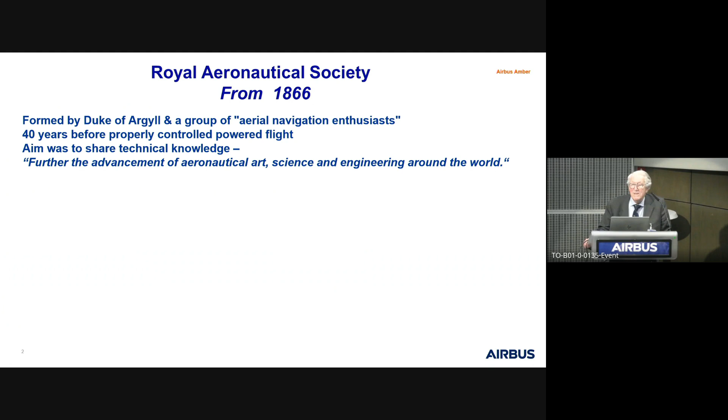A little bit about the background to the Royal Aeronautical Society. A lot of you have seen this too many times before, but some of you haven't. It started a few years ago, and the aim was to share knowledge, and further the advancement of aeronautical art, science, and engineering around the world, which we endeavour to do. That's one of the reasons we're here.

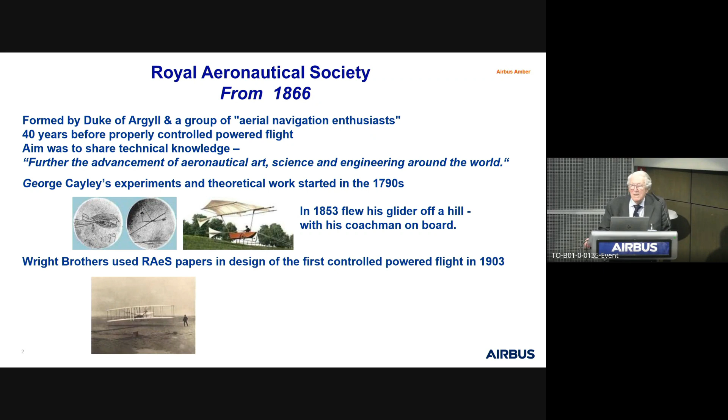People say, well, what were the Brits doing before that time? Well, George Cayley started his work in the 1790s, and worked out from his large mansion the forces, mainly lift and weight and thrust and drag. Going on from that, he actually launched a glider off a hill with his coachman on board. That's a replica with the intrepid Richard Branson on board a few years later. The fact is also the Wright brothers said they used part of his papers in the design of their airplane, which of course made the first controlled powered flight in 1903.

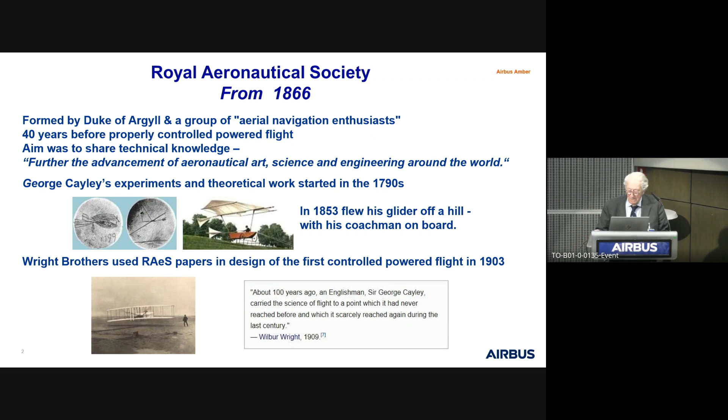The Royal Aeronautical Society has 67 branches in 20 countries. We now have 6 in Europe or the European continent, as the UK is still part of Europe, and the latest one was in Berlin. We encourage people to join either the local branch here or the branch in London, and applications are online.

Now, we are celebrating, of course, the Gordon Corps Lecture, and we have Nick, Gordon's son, with us. Going back to when the branch was formed by Gordon, because he was instrumental in starting it, and that was a group that joined, we still have 2 people from that time.

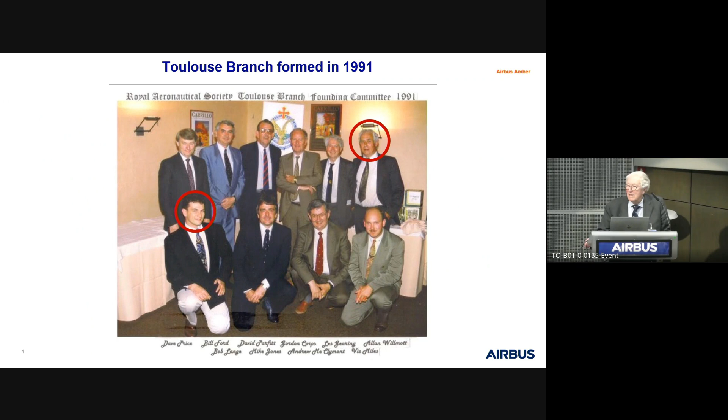Bob is still with us, and we have to thank Allan Willmott, who is actually registered online. He hasn't come today, but he kept the whole thing going in the late 90s, I think.

So this is Gordon's history. He was in the RAF, flew lots of airplanes. He became chief test pilot in the UK, mainly involved in the certification of the Concorde and the VC-10. Then he joined Airbus and was instrumental in the fly-by-wire system, initially on the A300. Very sadly, he died while investigating an A300 accident in Nepal, and as a result, he was honoured by this lecture.

The lecture theme is aviation safety or flight testing—Yannick Melange would have done flight safety this time, but we're doing flight testing. The lecture shield was started, which is outside, and his children, Nick, Debbie and Bryony, have been central to supporting their father. Nick is here tonight.

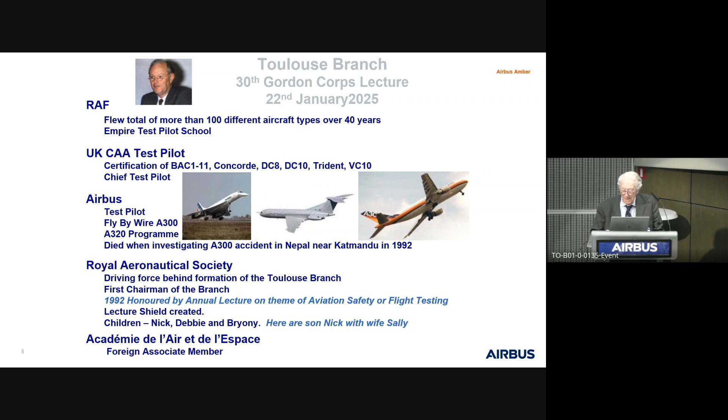He was also a member of the Académie de l'Air et de l'Espace. And there is the shield, which we have outside, with pictures of Gordon and his wife. Now, we have tonight our president of the Royal Aeronautical Society in London, David Chin, who would like to say a few words.

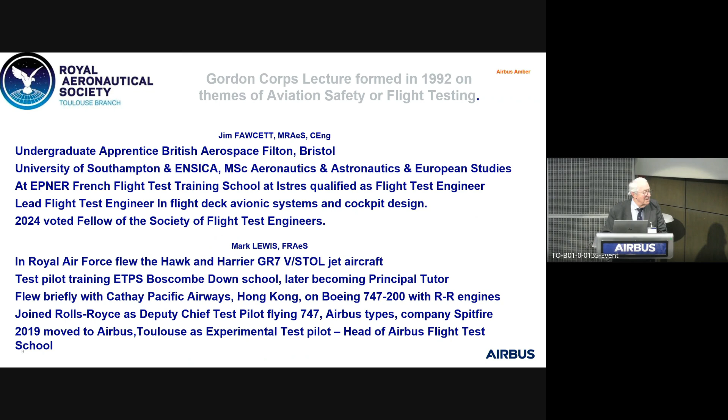As Hugh mentioned, this wasn't entirely expected for myself and Mark. We weren't expecting to be here this evening, even though it's a great pleasure. We had a phone call a couple of weeks ago asking if we could help out, and I found myself scrambling for knowledge about your father, because even though I've been working for Airbus for 30 years, I never had the privilege to meet him.

By an unbelievable coincidence, I opened a book which I received as a Christmas present this year, written by a previous flight test engineer from the UK, John Smith, full of interesting anecdotes about his time working in the UK, including at the CAA and with your father. I hope you won't mind if I share one of the little anecdotes from this book. Many of them seem to involve going to the pub, so it won't be one of those.

This one is about an incident Gordon had flying in the States as a CAA pilot. He'd been involved in an evaluation on the Gulfstream II, and Gordon was flying from the left-hand seat as usual. During a normal takeoff, they encountered a flock of large birds, some of which entered both engines just as the aeroplane was about to get airborne. Sounds familiar, doesn't it?

At that stage in the takeoff, they were above V1 and strictly should have continued. Gordon made an instant decision, as he had no idea whether either or both engines were still capable of producing significant thrust. He closed both throttles, put the aeroplane firmly back on the runway, and stood on the brakes. Even at that speed, there was just sufficient runway left to complete the stop. I heard later that the Gulfstream test pilot and others on the flight deck burst into an impromptu round of applause, and apart from two damaged engines and some very hot, worn-out brakes, they had Gordon to thank for still having themselves and their precious aeroplane intact.

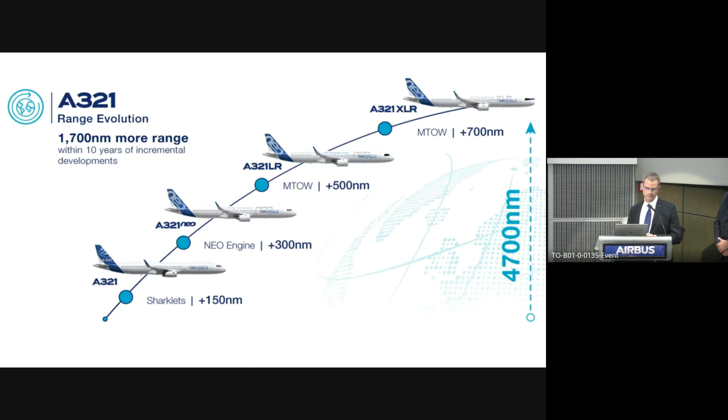But the customers wanted more. The trade studies suggested that more was possible. And so the progression was made to the extra long range with additional fuel tanks, a significantly heavier max takeoff weight, and therefore a lot of modifications to cope with a greater range of weights, centers of gravity, and greater range. So 700 miles extra, and depending on how we calculate the final figure, it's in the order of 4,700 nautical miles, which is a long way on a single aisle airplane.

So some really quite long stage lengths, as we would call them, or city pair connections, with anywhere between 180 passengers up to 244, depending on the level of comfort and the type of commercial operation that you choose.

Many of the new customers for this airplane, and I think we have over 550 orders, are putting really quite heavyweight seating in the front of the airplane. The lie flat business class seats, the newer ones some of you may have sampled, weigh a lot. So it has a big implication for the operating empty weight of the airplane and the CG before we start adding fuel. It's a very, very efficient airplane.

It's been engineered and reconfigured, including changes to the flap settings for takeoff, to really optimize and find the optimum performance for the city pair choices of the airlines.

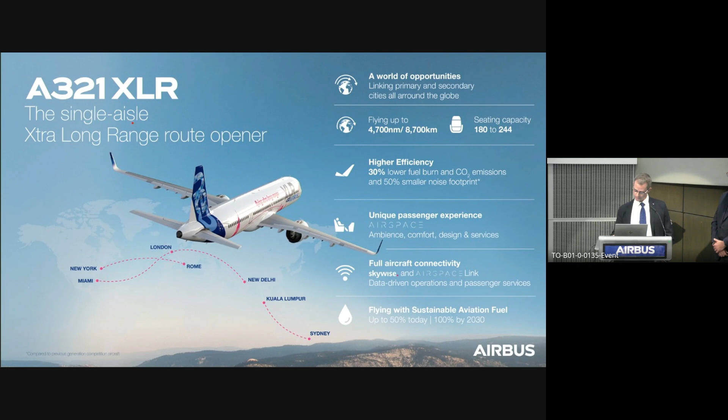So back to Jim for some system contrasts between the old and the new.

Thanks, Mark. Yeah, so finished with the marketing slides, and we'll start doing some more technical stuff now. We've got a nice little picture of the airplane here, and we'll walk you through, I think it's almost 10 of the principal modifications to the aircraft, and talk through some of the flight testing that was necessary to deal with that.

And as Mark has mentioned, the most significant difference, which allowed us to get that increased range, was on the fuel system. The idea of installing additional center tanks on Airbus single-aisle airplanes is not new. Mark mentioned the 321 long range, where we could install up to 3 additional center tanks.

These are actually quite small tanks. They're palletized tanks which could be installed and removed from the aircraft according to the customer's needs. So we can still have one of those on the XLR that can be installed in the forward cargo hold if the customer needs that little bit of extra range.

But the principal additional tank is the so-called rear center tank. And this, as Mark mentions, is a structural tank which is located directly behind the center wing box. It's the little green square which you can see on the image there.

So if we see what the capacities of those different tanks are, you can see here an overview of the aircraft. The historical fuel system on the A321 is unchanged on the XLR, 2 principal tanks in the wings and a center tank in the center fuselage.

But as I say, we've added this rear center tank, and then as an option, that's why it's in gray, the forward ACT, which can be installed and removed as required.

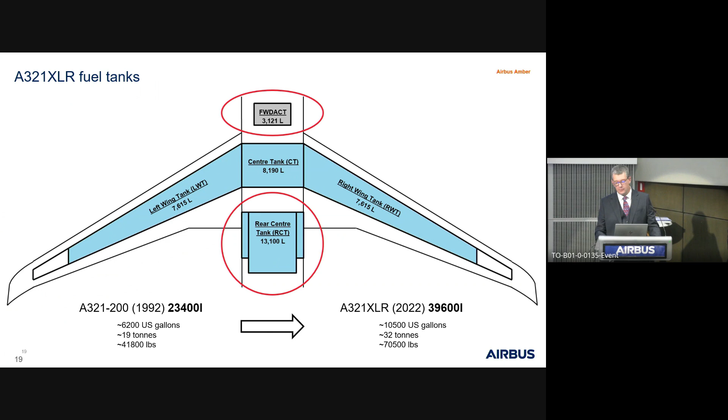You can see the numbers there on the screen, but when you crunch them and have the total volumes, you can see the enormous strides we've made since back in 1992, where we had 19 tons for the Europeans or 42,000 pounds for our North American friends. And we've almost doubled that in actual fact over the years by adding the RCT and the ACT. So that's a really, really significant increase.

Now, it's almost certain that when my colleagues at Filton were designing the fuel system, which was inherited from the 320 in many ways in the mid-1980s, they never in their wildest dreams imagined that their fuel system would have to operate on sector lengths up to 11 or more hours. And one of the main concerns we had with the XLR very early on in the flight test campaign was exactly that.

How would that fuel system perform if it was exposed to such a long operating time? We're not so worried about pumps running for 11 hours or valves operating correctly after 11 hours. We can test that in the lab and run fatigue testing. It's no problem. The principal concern was actually about temperature.

The fuel is located in the wing tanks, and the wing tanks are almost the last tanks, if not the last tanks, to be used. We keep fuel in the wings for as long as possible to reduce the wing bending moment. And that means that those wings getting chilled at high altitude cruise for 11 hours can also cool down the fuel. We need to make sure that the fuel does not get to a significantly low temperature that we start to have issues with freezing.

So a very, very early objective in the test campaign was literally take the aircraft and go flying for the maximum duration possible and see if the aircraft worked. So the guys in the fuel team came to me and they said, Jim, you like doing long flights, because it's true. I've done a lot of long flights for fuel systems in the past. Go away and make it happen.

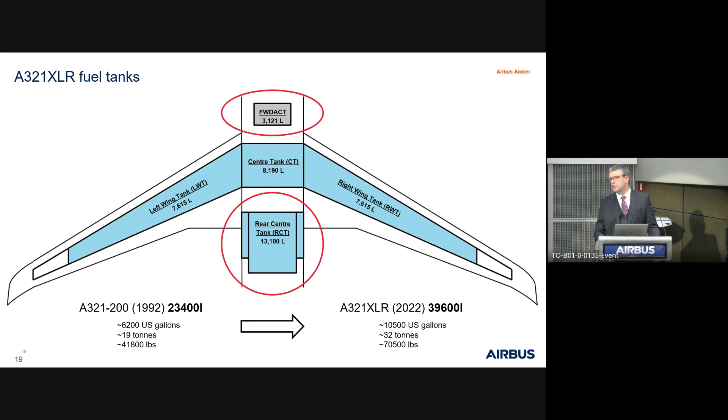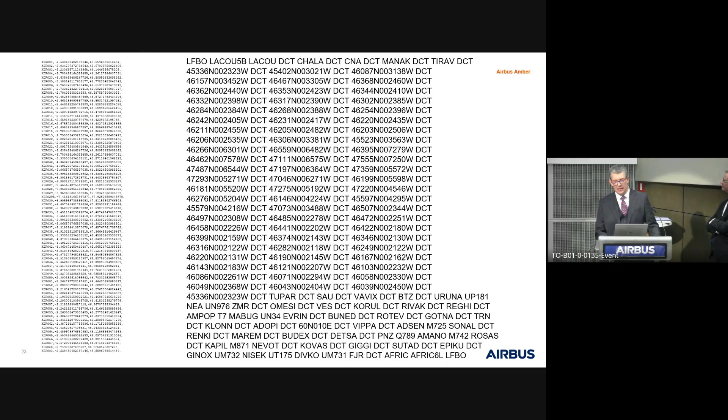Well, I could spend a whole presentation talking about going and flying it, because to write that image in the sky, bearing in mind we wanted to do it at high altitude for cold fuel temperatures, it took us 3 hours to write that in the sky. Flying the aircraft manually, doing very tight turns to make sure we were getting nice, crisp and neat letters so that our marketing friends would be happy. It was a very unusual piloting task, shall we say, but it did teach us a lot about the handling qualities of the aircraft. And the end result, I think, says it all.

So you will have seen that from the video at the start, the XLR we drew at the start of the flight. And by the way, we didn't tell anybody we were doing it. We were a little bit worried that we might not be able to pull it off, so we didn't want to make a lot of noise about it.

But by the time we'd finished and we were just switching over from the French air traffic control to the UK air traffic control, the last words that the French air traffic controller said to us was, 'You are #1 in the world on Flight Radar 24.' And yeah, we subsequently did some press work with Flight Radar 24, and they told us that at various stages on the flight, there were as many as 50,000 people following us in real time.

So that was a very interesting lesson to us that really everybody's watching what we're doing. And we have to be careful that we're not doing things which are difficult for people to understand. And it's one of the reasons why we're happy to share these kind of experiences with you.

The XLR was only the start of the drawing. We still had to then carry on flying the aircraft. And that's why we carried on with this extremely large circuitous route over Scotland and back down through Central Europe. We finally flew for over 13 hours, which is more than what the marketing guys will tell you. But that's because we have a very light test aircraft, so we were able to do things a bit more than what a customer would do.

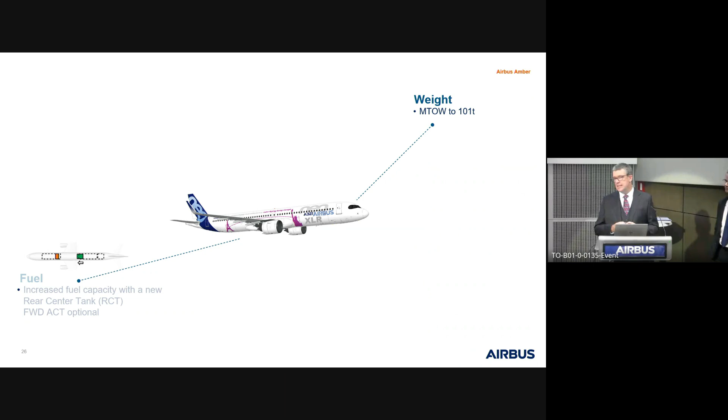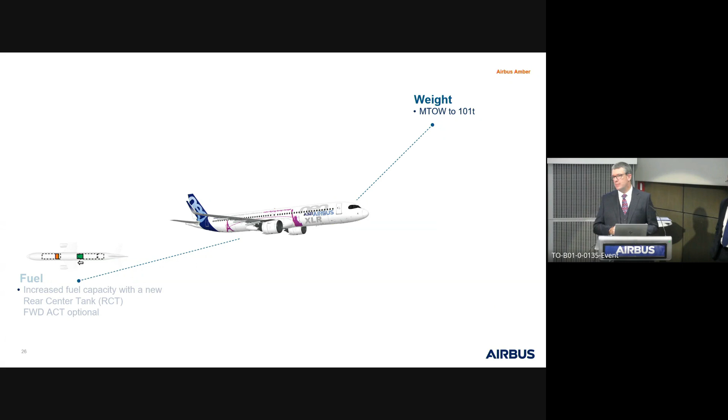So back to our little image, that extra fuel drove a design requirement to increase the maximum takeoff weight of the aircraft. In the late 1990s, we were hovering at around about 80 tons on the 321, and we've pushed it all the way out now to 101 tons as the maximum takeoff weight for the aircraft, which is clearly a significant increase. And all of that with a wing which wasn't really designed for that kind of takeoff weight. So I won't say much more about the takeoff weight, but you will see in the following examples some of the impacts which that had on our design and the testing which had to be done.

One obvious question which comes to mind is, well, what about the engines? Mark told you about the fact that the Neo engines brought us some good fuel improvement. People were concerned that we might need to use more powerful engines, higher thrust ratings, potentially increased fuel consumption. But the fact of the matter is that the existing engines that were certified for the 321neo have sufficient thrust for takeoff performance in the vast majority of conditions which our customers were looking for. So for this initial flight test campaign and for the early deliveries, there is no change in actual fact to the thrust rating of the engines, which comes as a surprise to some people.

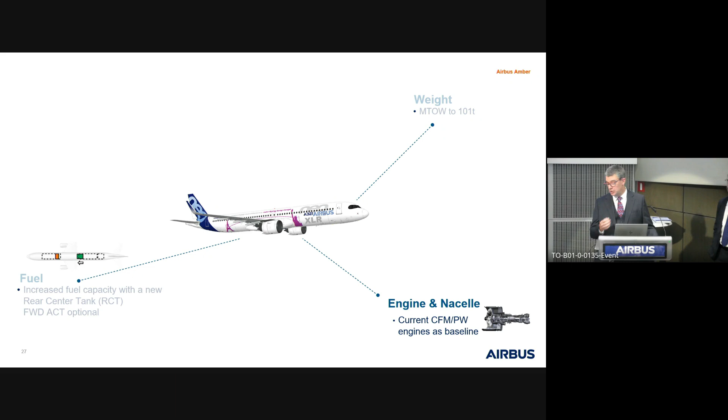Nevertheless, we had to beef up the aircraft structure as a whole. The wing is an obvious example, but the rest of the fuselage had to cope with things like shear loads. And as Mark has alluded to, there was a specific modification for the rear center tank.

So when we engaged our discussions with EASA regarding the certification basis we would be using for this aircraft, it was obviously many years before the first flight. We were always very open about our intention to use a rear center tank on this aircraft, and we came to an agreement that we would be able to do that simply using the existing structure of the aircraft.

After we had started building the airplanes, there was some discussion in various public fora which led EASA to reconsider their position, and they asked us to improve what we call the crashworthiness of the aircraft. Their basic concern was that if the aircraft was to have a belly landing and the fuselage was pierced in any way, the leaking fuel could potentially be a significant fire hazard, which we can understand.

There was a lot of toing and froing as to what we needed to do. There were basically two major outcomes that had an impact on the design of our aircraft. One was the need to put a liner in the RCT. In the original design, it was just a metallic structure. Now there is a secondary skin inside the RCT, so that's a second level of protection. Even if the fuselage is pierced, there's still a liner inside the tank.

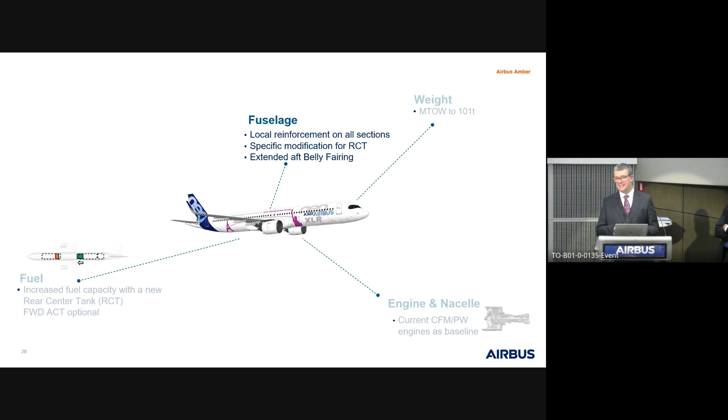Now, we couldn't let those skis hang around on the outside, so you can start to understand some of the reasons behind Mark's example of the belly fairing change on those pictures. We're going to play a little game of spot the difference, but Mark's given the answer away already here, so it doesn't really matter, with some pictures from our personal photo collections.

This is Mark taxiing out for the first flight of the second aircraft in Hamburg in 2022. And here is me performing GLS trials at Frankfurt Airport around about 18 months later in exactly the same aeroplane. I'm sure you could all spot the difference, right?

I'll do it again for you. There's Mark. And there's me. So if you've got really eagle eyes, I'll put them back to back. You can see exactly as you saw on the pictures from Aer Lingus, the actual physical impact of that modification, because those skis had to be hidden behind a belly fairing to ensure that the aerodynamic performance was not affected.

So a number of impacts for us in the flight test campaign. First of all, an extension of the flight test campaign. We had already got the aircraft delivered to us in the original configuration, and we had to modify it during the flight test campaign, a process of several months. It's easy when you build it in the final assembly line, but when you have to retrofit it in service, it's a much more complicated exercise.

The second impact is that it obviously modified slightly the weight of the aircraft, so we had to go away and do our performance measurements again to check that there was no issue there. And finally, from an aerodynamic point of view, this additional belly fairing meant we needed to check the aircraft had no issues in terms of stability. We're changing the side profile of the aircraft, and we need to make sure we haven't changed the characteristics of the aircraft. So all those things, even though at the end of the day it looks fairly similar, had a significant impact on our campaign. Mark, it's back to you.

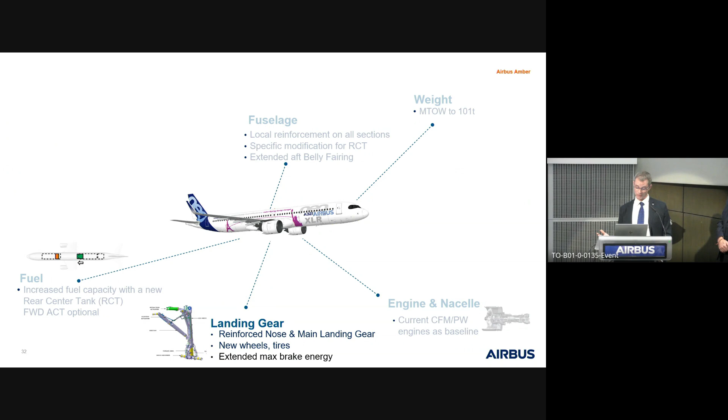So on to landing gear. The original airplane had a double shock absorber configuration. The new airplane has a single shock absorber. And clearly with the heavier weights and greater kinetic energy, you need to look again at your requirements for wheels, tires, and brakes because of the increase in brake energy. So all of those things have fundamentally changed: landing gear, nose and main, and the tires as well.

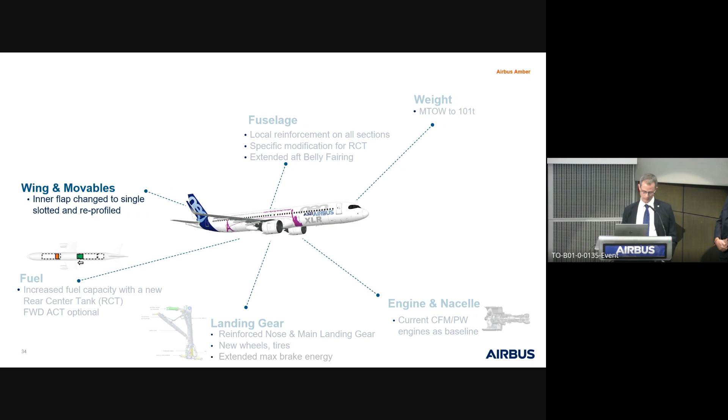The most interesting parts, I think, from the test pilot point of view, are the changes to the flight control system. Like the rest of the A320 family, the XLR is a digital fly-by-wire control law airplane. The older airplanes had mechanical rudder, but with augmentation from the fly-by-wire system. On the XLR, you have an E-rudder, so an electronically controlled rudder. So all three axes of the flight control system are now fully fly-by-wire.

Those who fly the Airbus will know that the 320 family has different kinds of computer. You have ELAC, which is elevator aileron computer. We have SEC, spoiler elevator computer. And we have FAC, flight augmentation computers, and there are two of them, but they're not on this diagram because they've been deleted from the design. So now we're down from 7 computers down to 4. So we have 2 ELAC and 2 SEC.

And the control laws that live inside those computers, the software, are fundamentally different to what we had before. They're called generic laws or G-star laws, and I contrast that with C-star laws, which we have on the previous airplanes. And the reason we were able to take advantage of this change in control laws is these laws have been evolving with the design office over the years in parallel with the development of the airplane family, and they were mature enough to put into this new airplane.

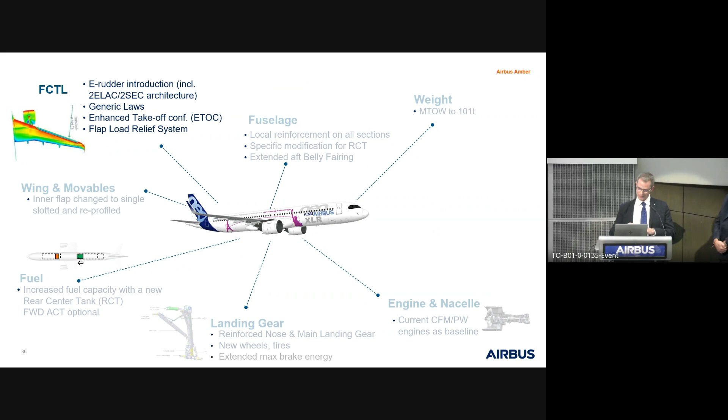If you exceed the speed limit for the flap, you'll get an overspeed warning. In the meantime, the loads are taken care of by the relief system, and then we can slow down and reconfigure.

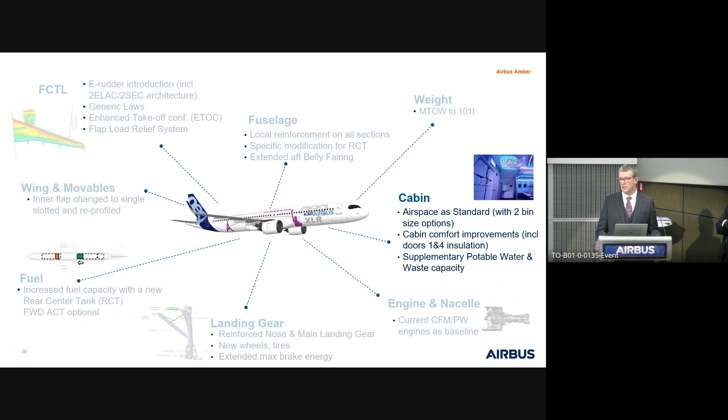It's also the cabin which offers you these very large overhead bins. We all know airlines have this tendency these days to charge you for luggage, and therefore we're all desperate to put everything in our carry-on baggage rather than pay to put it in the hold. And I'm sure you've all had that terrible call, sorry, it's full, you're going to have to check in your hand baggage now when you've been at the gate. So one of our solutions to that is to increase the volume of the overhead bins, and I don't remember the exact percentage, but there now is the possibility to put the bags in a vertical arrangement, whereas historically you were always putting them in a horizontal arrangement.

We did have to take into account in the design of the cabin the fact that the aircraft was flying for an extremely long period of time. You may all have had experiences, I hope not on an Airbus aircraft, but on other long-haul journeys of having cold feet or a cold head or finding a draft or something like that. And we were concerned about making sure that the environment for our passengers was going to be comfortable. And that environment goes beyond just being comfortable sitting in your seat.

It sounds like a bit of a joke, but if you've got 240 passengers and you're flying for 11 hours, that's a lot of visits to the bathroom to cope with. And there was an issue on the 321 long range when it initially went into service of the capacity of the water and waste tanks being insufficient for those physiological needs. This was addressed on the XLR by increasing the volume of both the potable water tank and the waste tank. Nothing worse than having to do an in-flight turn back because your toilets are full.

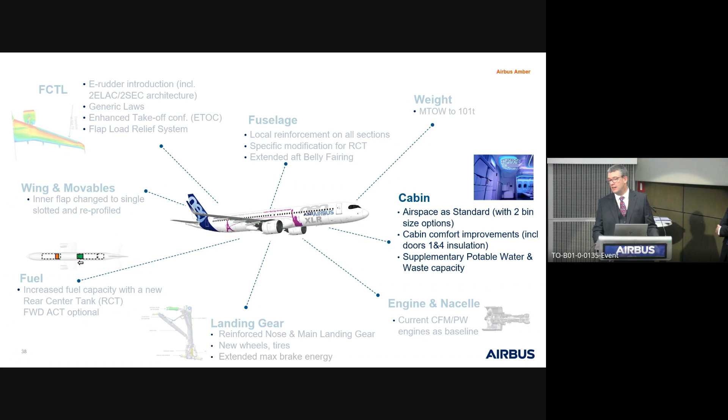And maybe there are some people in the room who can remember that from the early days of some of our long-range products. I can see a gentleman nodding in the back. So actually, the simple fact that we needed to make the waste and water tanks bigger drove one of our significant external campaigns for this aircraft, which was to go even further afield than Keflavik, and actually to visit our friends in Canada in Iqaluit. So Iqaluit is a favorite test place for us, relatively accessible from Toulouse.

It's around about 6.5 hours flying. In older days, it would have been known as Frobisher Bay - maybe that's a name which rings a bell for some people in the room. But we can go there and relatively regularly get temperatures significantly below -20.

So for the testing of the water and waste systems, we were looking for -25. We had sent another test aircraft a couple of weeks previously for systems testing, and they had even colder temperatures. We're actually working at the moment with our Canadian friends on another cold weather campaign to further extend the low temperature capability of the aircraft to address the requirements of some of our upcoming customers.

But it's perhaps another example of how what could appear to be a very minor change to the aircraft and its design - and indeed from a passenger point of view, a totally invisible change, you don't see the water tank when you get on board - can drive a very large number of flight hours or flight cycles in the test campaign, and give the numbers we saw at the start.